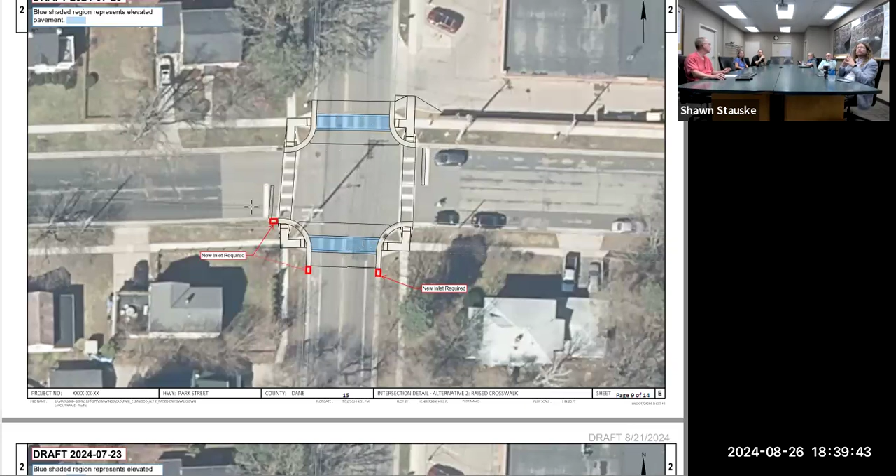It's quite a bit more money to raise the whole intersection too. Yeah, it was about double. Because you could do 2 intersections, you're just raising the crosswalks, for the same price.

Not quite, I guess, but it's something to consider, depending on where the storm sewer is, because that's going to be in addition to the concrete, if we have to relocate them at both intersections that we do.

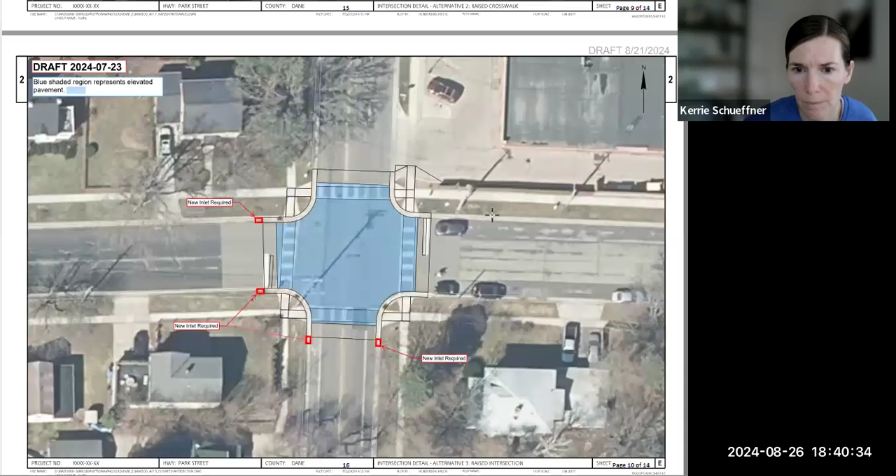I'm okay with number 2 for 122. Seems like, you know, the least -- at least doesn't cost as much, but it does certainly make an effort to slow some traffic down and create a scenic area.

How do those raised crosswalks survive and work in winter climates on a busy road like this? We're about to find out. We have some at Red Tail Ridge, brand new. Other than that, we just have speed humps, but not raised crosswalks.

Those aren't on Park Street, are they? Yeah, uh-huh. I'm just wondering. But the plows have to go up and down all the same streets. Sure, like Valley Ridge, it's got those big, long, wide monster concrete ones.

They should, I think, plow reasonably similar to us. It's the same approach. You cut the concrete, cut the pavement out, and then pour in the raised concrete walk area, crossing area, correct?

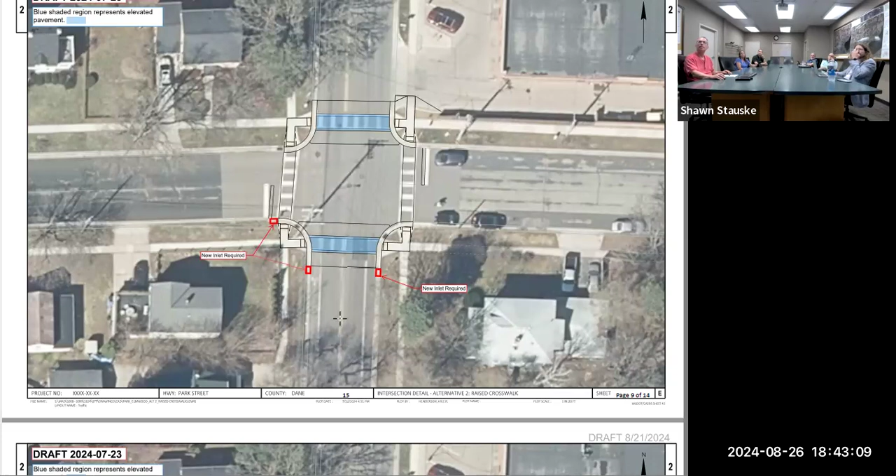Oh, I was just wishing I wouldn't have missed that meeting. I was trying to find the minutes. I don't think they're published yet.

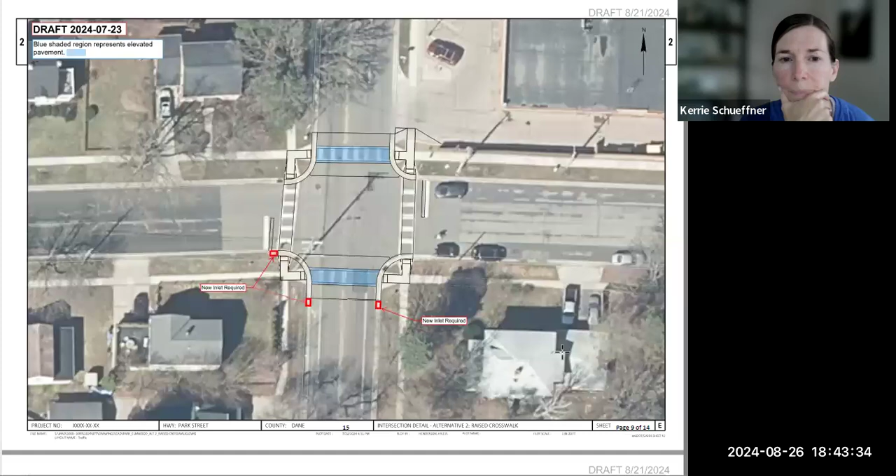I just wanted to better understand the benefits of a raised intersection versus the raised crosswalks. I kind of agree, for the cost it seems like it might meet the same purpose. I wish I better understood what the committee was thinking. I don't know if Mark shared more information, Shawn, on why the elevated intersection alternative was the preference.

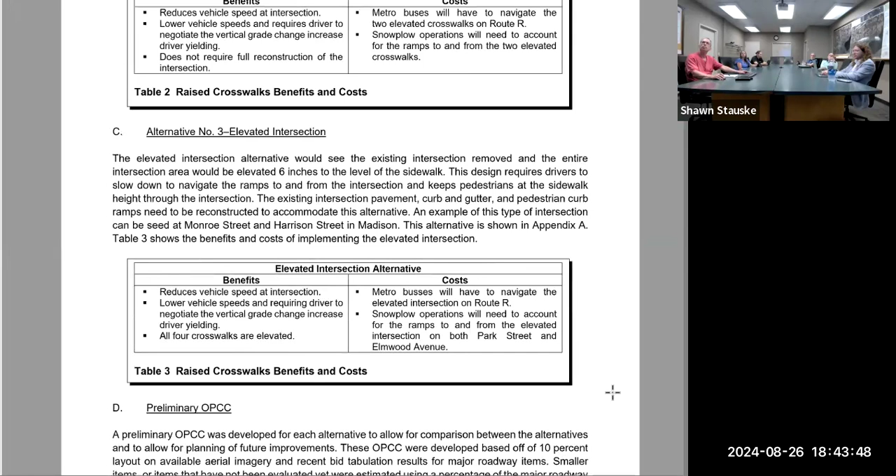You can look at these grids here for the comparatives on them. It's pretty similar from a comparative pros and cons standpoint. The elevated option effectively has higher costs because it's more concrete. The way it's described, the raised crosswalks don't require full reconstruction of the intersection, so we wouldn't have to adjust all the castings out in the intersection and replace the blacktop with concrete. It might be worth looking into a hybrid where we do the approaches with concrete, but the flat central area just gets paved with blacktop.

It costs a little less upfront, but it might not last as long. That's sort of a higher impact area then.

The raised table intersection might be marginally better in terms of ADA accessibility, because you're not navigating down into the street and then up again on the ramp. You're staying at one level, so if you're a wheelchair user on the raised table, yeah, it would have flatter, if not non-existent, ramps, because the whole intersection just goes up basically to the elevation of the sidewalk curb outside the street.

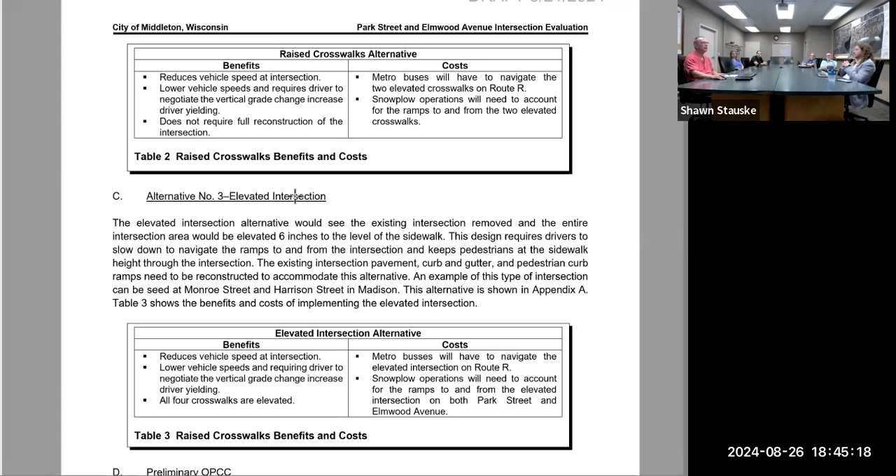One of the things to think about comparatively: it's rolling quickly, so for those with vertigo, if you had four of these on a bicycle, you'd be going up and down repeatedly. Or worse, around a corner, you'd be going up, then down, then back up pretty quickly while cornering. It might be a little convoluted for a bike or motorcycle, something with less friction than four tires.

A motorcycle can handle it, it always depends on the speed though, doesn't it? Motorcyclists who ride that fast are just plain reckless. We should probably consider the bike aspect here since Elmwood is the designated bicycle corridor. I wouldn't worry about motorcycles. And yet I would.

Particularly from a bicycle standpoint, having to go up those raised crosswalks twice, and even driving, that's going to slow things down. I understand option number 3 is a little more expensive, but I think it's also probably longer lasting, more effective, and easier for people to navigate.

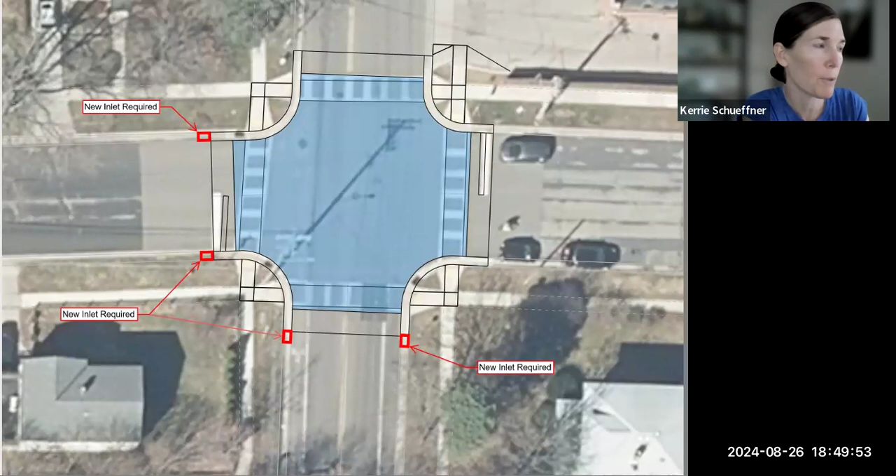Kerrie, you have your hand raised. I was just gonna say, in the memo it said that Monroe Street and Harrison Street in Madison have this raised intersection, so I pulled it up on a map. I don't know, Shawn, if that would be helpful, but it doesn't have the vegetation, just like what you're talking about, like a satellite image.

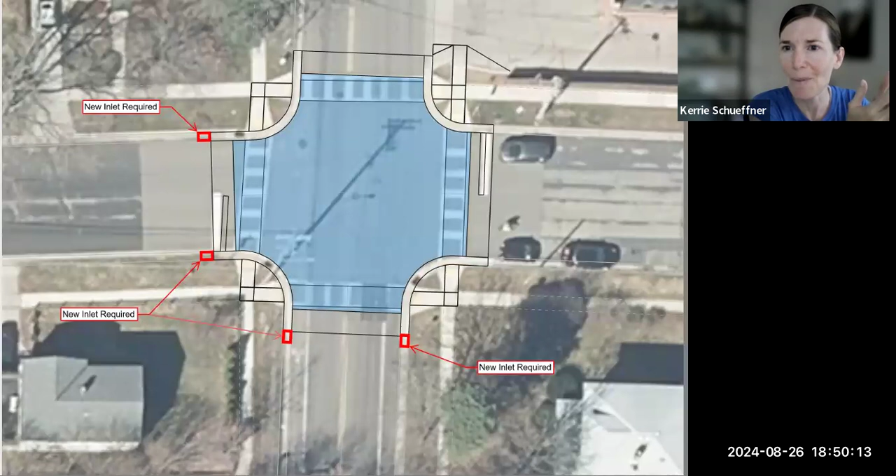I've definitely driven on Monroe Street, and I don't remember that it was a huge inconvenience. So I'm thinking that the raised intersection might be a good way to go, especially if that's the other committee's recommendation. But it's good that we have an example, locally.

This goes ahead, it's 2026. I put money in for the raised crosswalk in the 25 budget for consideration. Just the crosswalk, not the raised intersection? No, the raised intersection. Yeah, we requested 250,000. Yeah, it was down near 7 on the list, something like that. Yeah, it wasn't rated top of the list.

So what do you need from us tonight, Shawn? Just concurrence or not, but I'm trying to figure out before we engage anybody to move into final design, is that what we want? Because if not, we need more discussion first, otherwise we're just planning the wrong thing.

Ped Bike has gotta come back with their final recommendation, because they have not yet. I got the impression from Mark Opitz, by consensus, they were satisfied with option 3. I didn't get the sense that they wanted to take it back up, but if Public Works Committee has a different impression, I suspect they would be happy to take it back up.

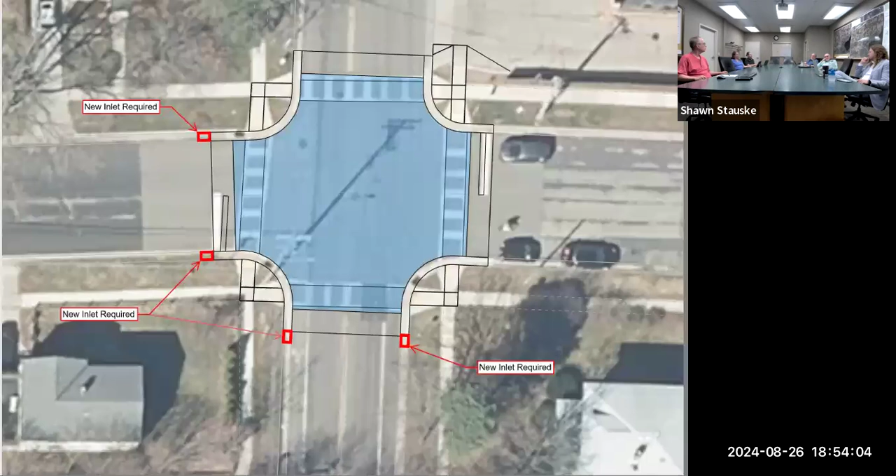I understand wanting to not spend money. Yep, we're just spending other people's money. So I'm always about, in my opinion, just finding a reasonable place. I think it's important to be mindful of the money we spend. We want to meet everybody all the way around. We want to give them a safe place to cross. We want to control traffic. We want it to be effective. And we want to always make sure that we have money for other things.

With this project, we could do 2 raised crosswalks, one somewhere else in the city, as opposed to 1 raised intersection in 1 spot. Accidents there, Shawn? It's been a while since I tracked crashes here.

So I don't know, it doesn't stick in my memory as a hot spot. Can't say. Kerrie, you've got your hand up?

I was just thinking that maybe, I agree with the recommendation to throw it back to the Pedestrian Bicycle Transit Committee, or maybe we defer this until the minutes are published so we better understand the reasons why the raised intersection was more preferred, to get their perspective from the bicycle side. We kind of talked about how maybe for bicycling it would be better, but I think it might be helpful to get more information before we make the decision, if we have time.

I don't know, Shawn, if we defer this or wait, how does that work in terms of design and implementation? Sure, that's a good question. I don't know for certain, but the way I'm envisioning this is once we release Strand to pursue final design, ideally we'll have something put together and out for bid by December, maybe January. It's not a very complicated bid package we have to put together for something like this.

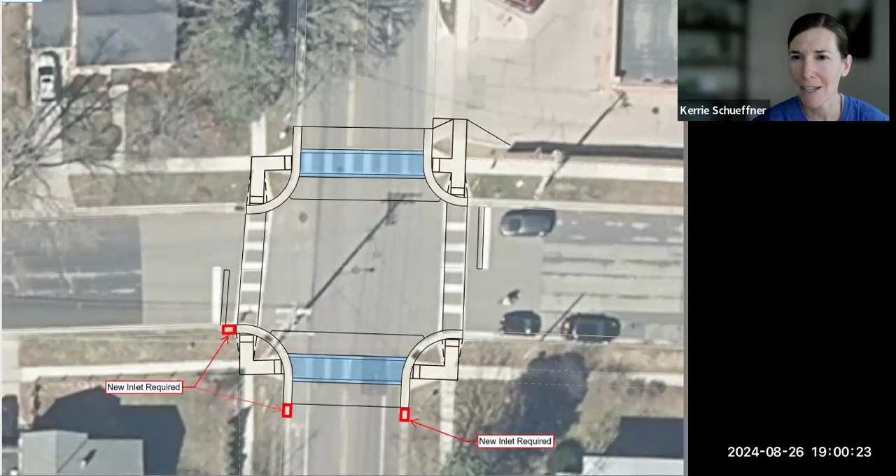Shawn, with that deferral, is it possible to ask for the minutes, or how do we get some more information from them? Yeah, I'll see what the minutes say. I think Mark gave me the verbal summary of what he was prepared to write, I just haven't seen it yet. That's all I could put in our packets for now. I don't know if there was an intention of giving more in writing, or the other option would be to view the portion of the meeting where Ped Bike Transit discussed this prior to reaching consensus, which would flesh out their thoughts and reasoning more.

Okay, I still think we should wait for the minutes. Yeah, I agree with that. And they may see this discussion and decide it would be a good idea to give us a very clear summary of exactly what their considerations were when they coalesced around option number 3. Sure. I would imagine Mark could do that. Opitz. Yeah.

Well, ideally, minutes are really just the official action of the committee, not the discussion or rationale. But that would be embedded certainly in the video. Yeah, and I got the impression there were no motions made, just discussion and consensus.

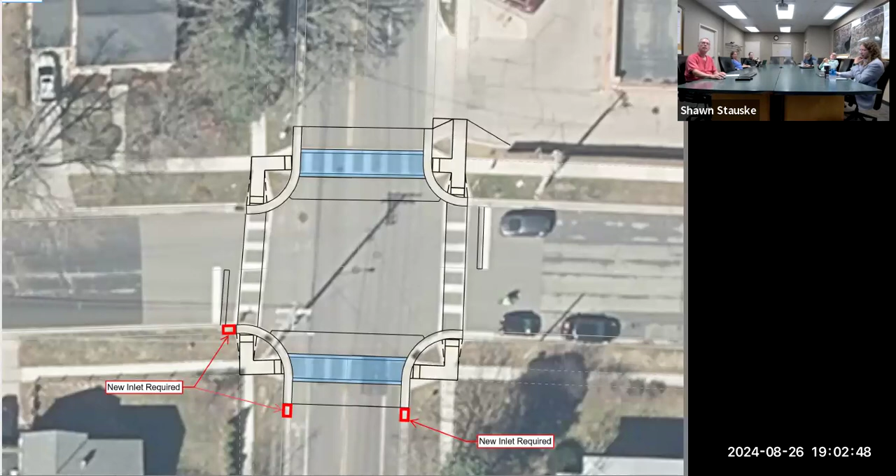All right, item number 3, Parmenter Street reconstruction, Amendment 4 to agreement with MSA for revisions to final design 09-117. Sure, the short version is this is what we knew was coming. When we sat down a while back and talked about final design, it was understood that final design was ongoing and a bit iterative because of the bike ped versus condemnation change we've been dealing with. So we were trying to get consensus of property owners for the real estate necessary for the design. Through a multi-loop process in design, Krista Sommerfeldt is actually with us tonight from MSA, who did the guts of this work, and finally got final design to the degree that there seems to be acceptance of abutting property owners.

And so, what we knew at discussion at the committee level last time was there would be a need for an additional amendment to account for the extra work that went into that, and that's what this is. This has already been reviewed by the city attorney. It's in our form, but no, it's been reviewed by me. So I don't anticipate any city attorney red flag.

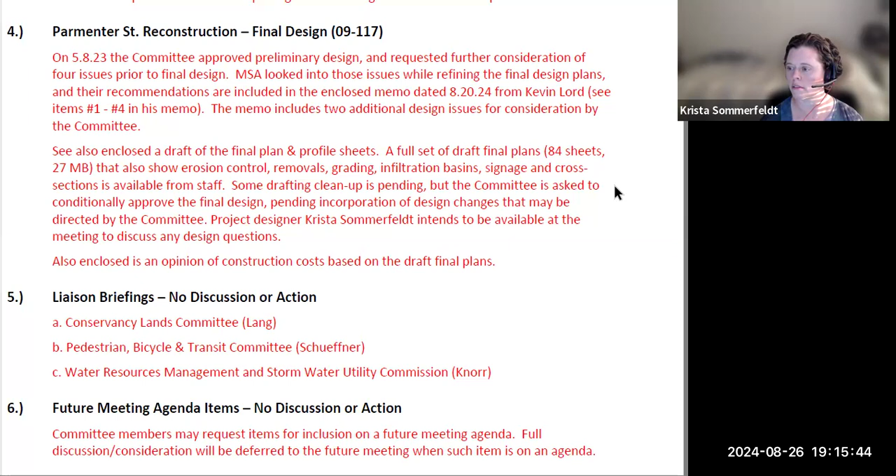While Krista's looking into that, are there any other ideas or issues we should be thinking about? Looks like the plan view has a pedestrian path on the east side - correct, that's the multi-use path. Yep, multi-use path. West side is sidewalk.

It looked like early on there was supposed to be a multi-use path on both sides, is that right? No, there really wasn't, even from the concept section we were looking at. It was an idea from the Public Works Committee to look into multi-use paths on both sides. That's one of the things this design memo recommends against, for lack of space. The design is difficult enough with just the sidewalk over there, but trying to widen that suddenly to 10 feet starts taking extra real estate, which is what we've been working against at two properties in particular.

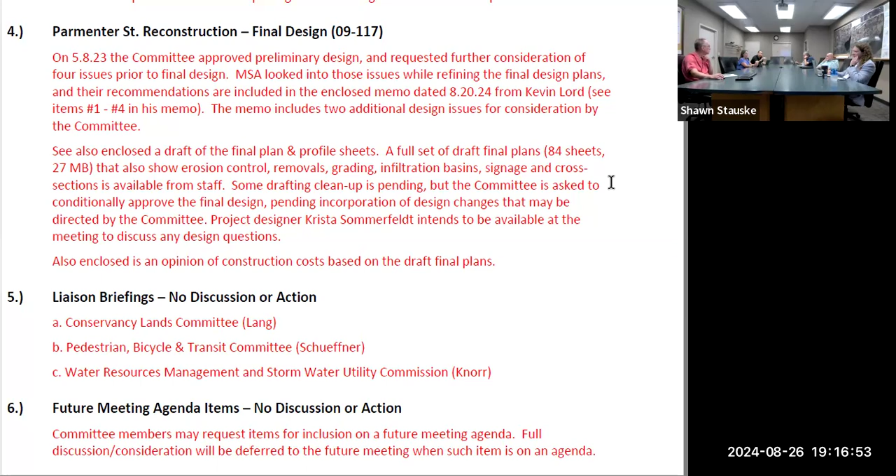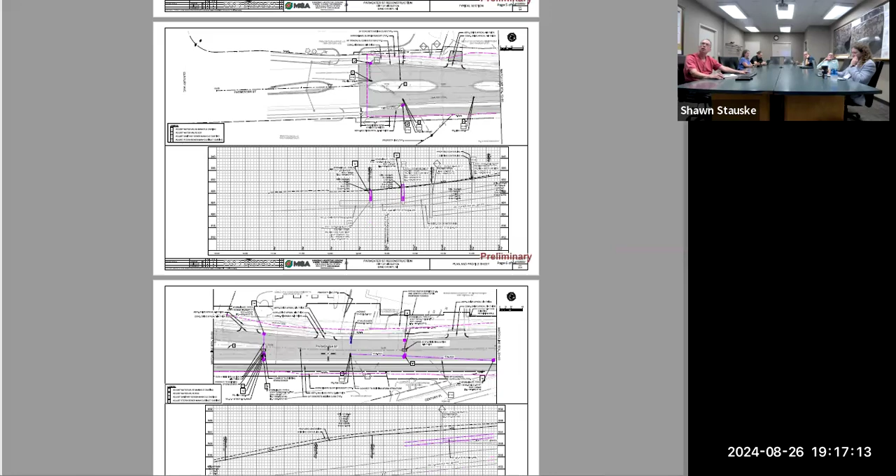Where does that driveway sit in relation to the right-of-way line? It's the spot where we needed the most acquisition, but we had the least opportunity to make the turns into REA work well. So while this median had originally extended through the middle of the road at 22 feet wide, it is now 0 feet. That's one of the biggest changes we made to the cross section, because we had to make this work for the property owners.

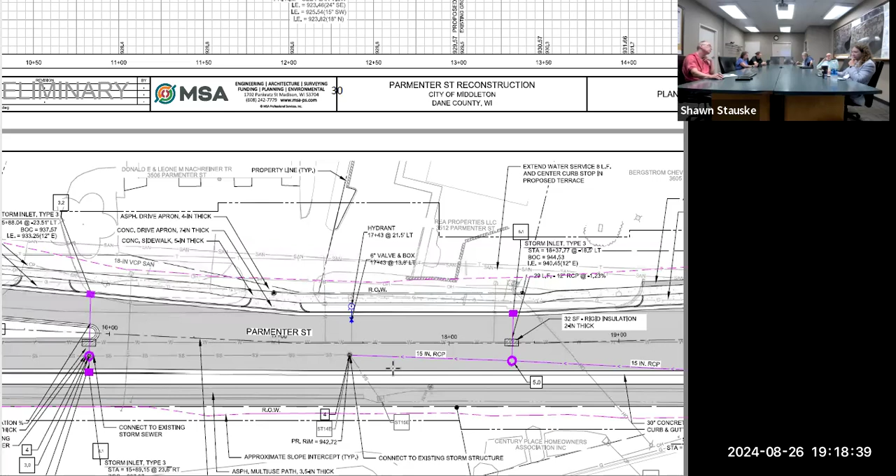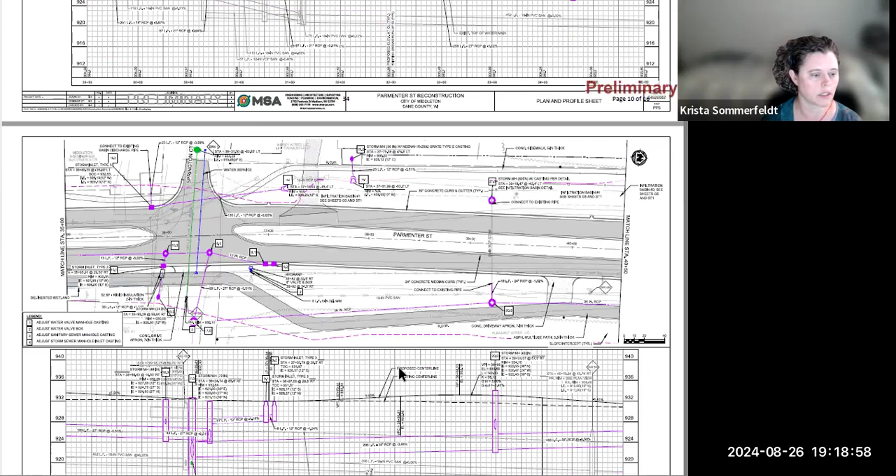Ron, going to the map, show the drawing titled G2, I think. G2, it's got Century Place on it. Drawing a bit of a blank - keep going. G2 would probably be up closer to the beginning of the plan set. You're looking at an overall view, is that what you're asking about? Oh, there you go - is that G2? Okay, zoom in on Century Place.

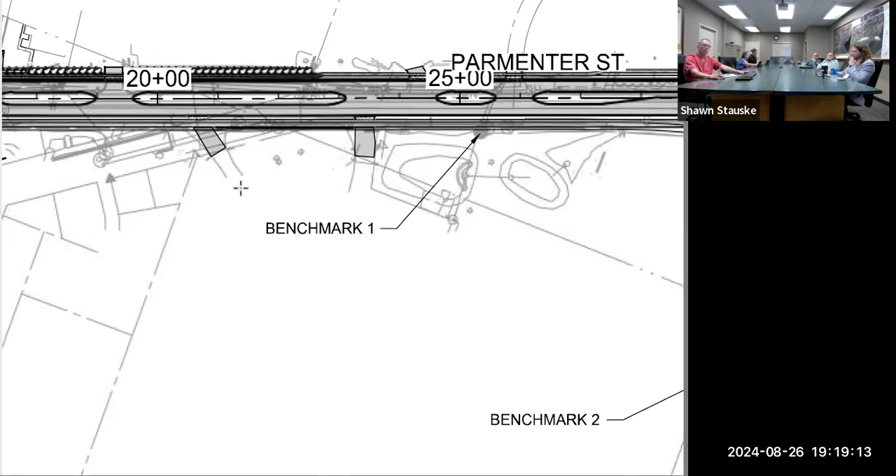Okay, so what you're saying is, right now Century Place is a dead end to nowhere, and on the proposed plan that will remain the same. What Charles is asking is, is there a way to have a bike path connect through to there, or to completely open it up? Well, I'm not asking to completely open it up - you just want a wide enough path for a bicycle to get from here, if they're there, to there.

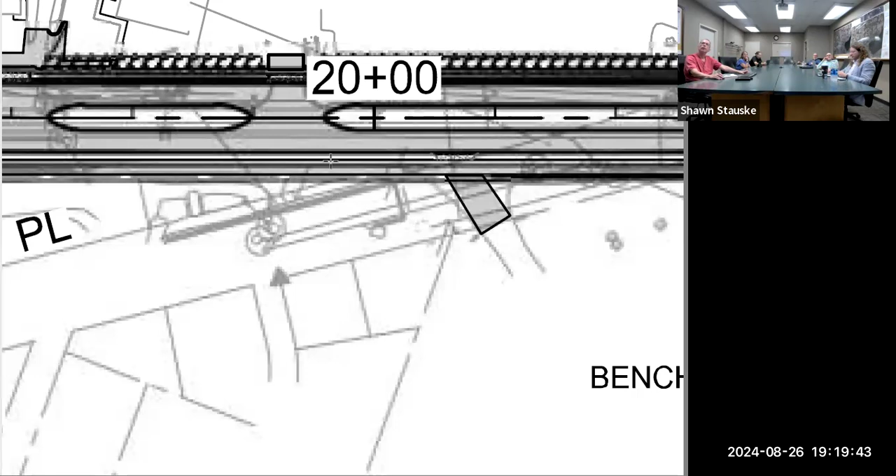Yeah, part of what I didn't remember is that there's a retaining wall there, and this isn't at the right level of detail for me to... I was looking at that Google map. I know we had some along the cemetery - let's see. Yeah, it looks like we're okay at the end there near that station 20+00. It looks like we would be okay - we're matching into the grade relatively close there, so there's not a wall or a big change.

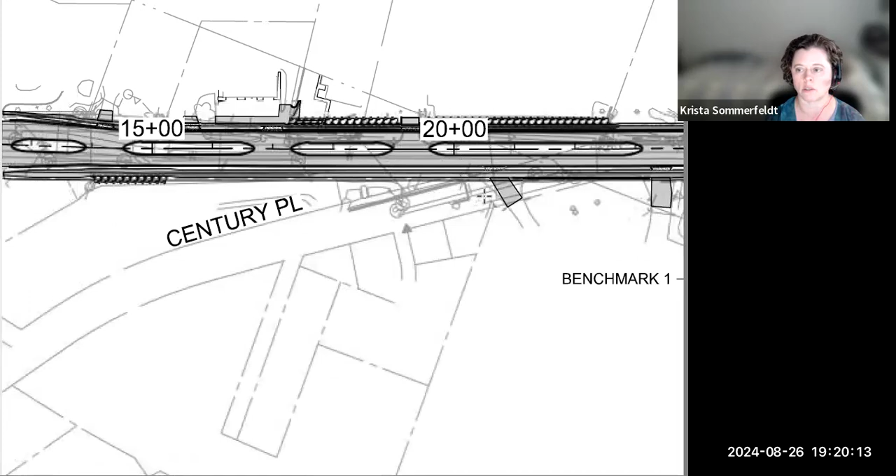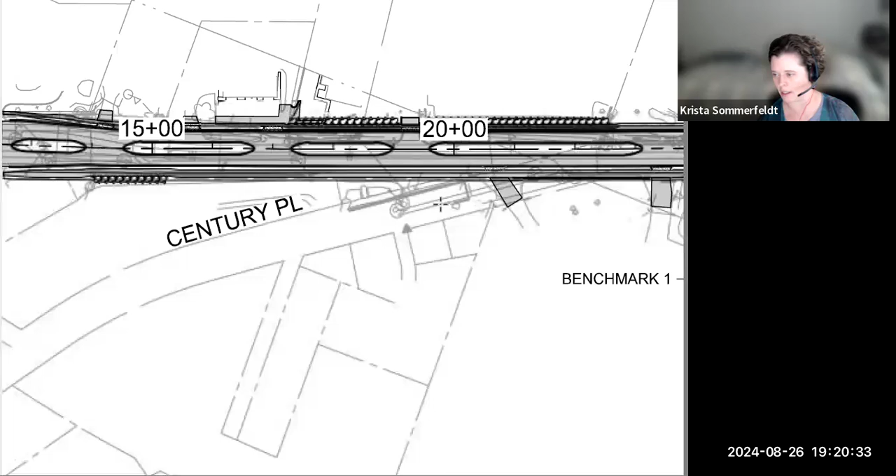Okay, there needs to be some connection there for bicyclists. Part of what gets goofy is there's a driveway connection right here - yeah, I see that - and then a bike path and a roadway. And it looks like there's sidewalk on the east side, is that right, of Century Place?

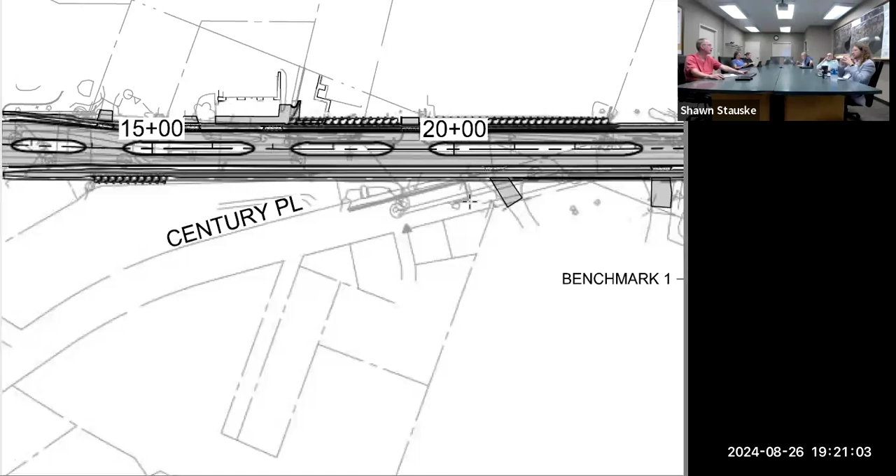I think we do have sidewalk over there, on this side. Sidewalk on Century Place - well, there's sidewalk in front of the homes, but not at this end of Century. Oh wait, yeah there is, sidewalk right up to the end. Part of what caused the request to the city to discontinue that was traffic from Springs Industries using Century Place.

Scroll a little south on that map, just a bit. Let me see if this lines up with what I'm seeing here. So what I don't see on there is that right now there's a sidewalk on Century Place - I don't see it on this map. Well, this isn't showing the sidewalk of Century Place, just the right of way. Yeah, so there's a sidewalk that parallels Parmenter. You could actually turn in off that sidewalk and have it connect to our bike path.

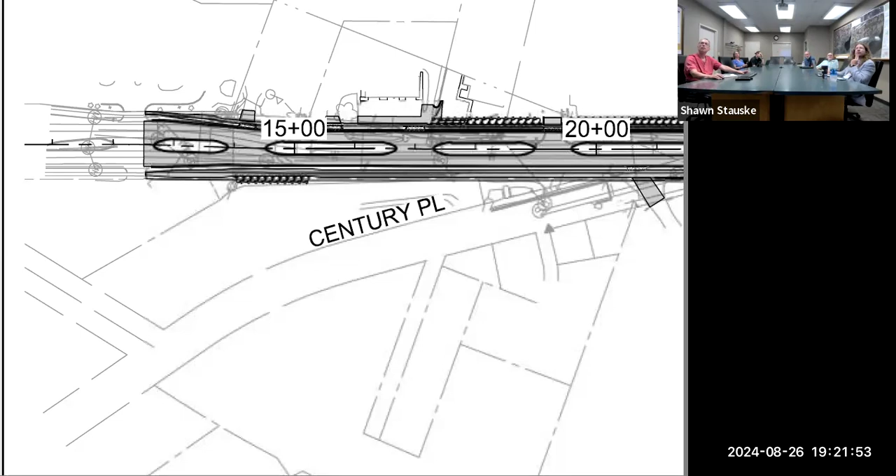Okay, so we could probably get a sidewalk in here without cars. No, there is a sidewalk right now, and it ends though, you know - it ends with the driveway. The sidewalk's interesting, it connects and loops around and back to Century Place.

Interesting - I think that's through the cemetery. Is that the road you're looking through? Oh, is that the cemetery? Yeah, well that's just a little driveway. Yeah, so that little driveway just comes back out. What if you drove into the cemetery as a bicyclist and had a bike path that connected that driveway? Because I don't think you're burying people along the road, are you? Maybe you are - yeah, those are lots on both sides of the driveway. All right, take that out of the discussion, let those people rest. Well, if you build a ramp...

All works out. All right, we're back down to the end of Century Place. Yeah, right, and we can look at it. It might get a little convoluted as to what's going on, but we could look at maybe connecting that sidewalk out to the bike path - if nothing else, in such a way that drivers aren't tempted to drive on it or get onto the wrong thing.

Yeah, to put a sidewalk-size path there - doesn't look like it would be very long. Just give people very clear and obvious context clues that they can't possibly misinterpret, that their car will not go here. I think that might be the play if we're making a connection, which we should be doing for bicycle infrastructure anyway.

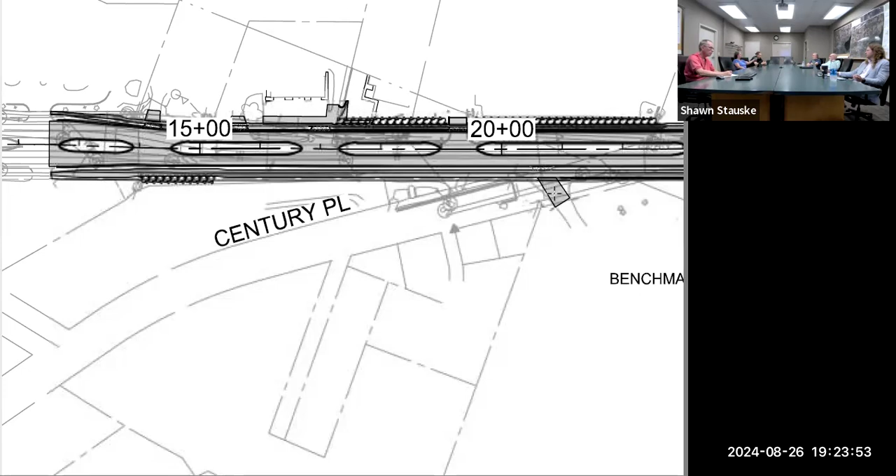What's a bollard? It's that kind of concrete stick. Oh, the yellow OSHA yellow post that you shouldn't run into sometimes? Yes, okay. If you're lucky they have some arrows painted around them that warn you, oh hey, there's a separator around here. OSHA yellow post, gotcha, okay.

Put one right in the middle of the wide bike path so that it's sufficiently narrow on either side that a car cannot traverse. And at that point, if the car decides to use the bike path, literally nothing we could have done because they would have just driven on the grass. But I think if we can find a way to connect the sidewalk out to the path, that probably would be okay.

Great, yeah, because it would be nice to have them connect. Yeah, sure.

Well, you cannot put it there and then over time see actually where the dirt gets worn. If people go there, they have a reason to walk there - the eroded path, yes, that's what that would be called. Like an eroded path, a goat trail. Well, it's Wisconsin - deer trail.

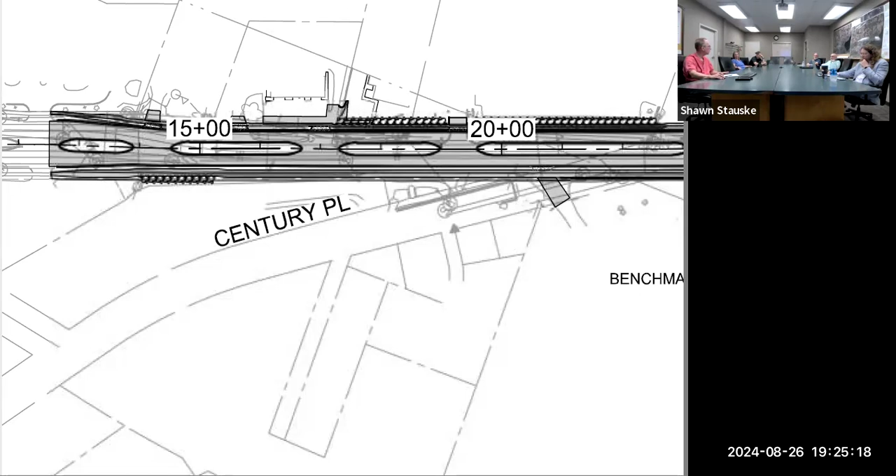Is there any thought about the recommendations in the memo from the issues Public Works asked us to look at last time, design issue wise? Let me zoom back out before scrolling.

So we were just discussing the idea of looking at bike paths on both sides, multi-use trails on both sides of the street, and the recommendation is not to do that, for right-of-way interests. There was discussion of considering potential to paint the bike lanes green. That would be costly, annually costly.

The recommendation is against that. Was that the whole bike lane or just crossings? Well, that was the ask - to paint the bike lanes green or protect them in some way. It's kind of mirroring what Madison has done in a lot of areas, because they've painted them green. But in some parts of the world where it's really bikes only, they are green, but if it's pedestrian, they're not. So what Madison's done is, yeah, you can walk on it, it's for pedestrian and bike, but we're still gonna paint it green. Madison's just kind of done their own thing.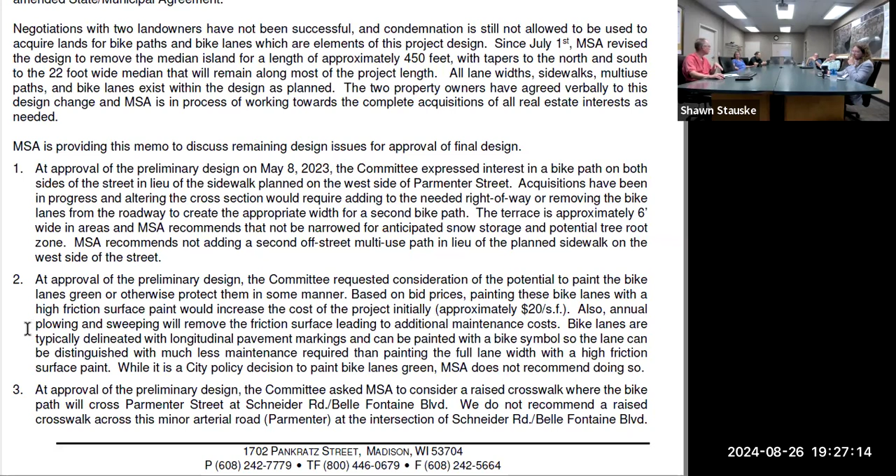Well, at crosswalks though, or at street crossings, not the entirety of the bike lane? I think it's allowed in bike lane extensions through intersections and in bike lanes. There's some sections around Madison that are pretty long sections of all green, but to say pedestrians aren't allowed there is not the case in Madison - pedestrians sort of go where they go. So anyway, the recommendation is against putting green paint on these bike lanes.

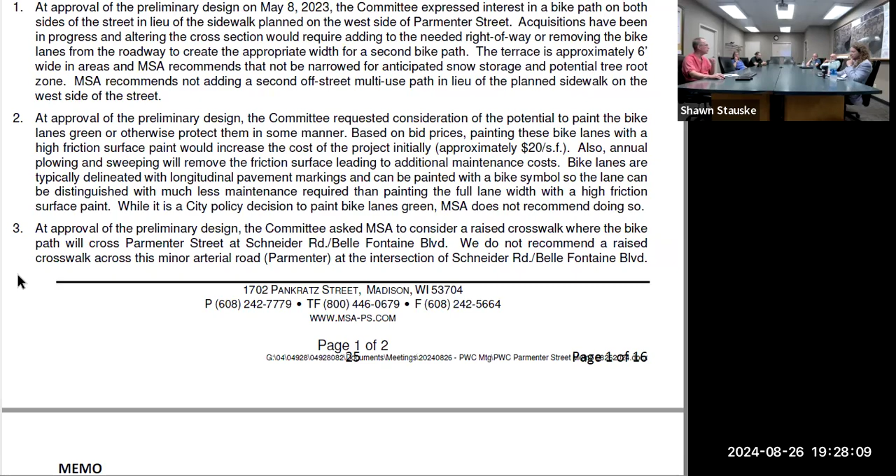We were asked to look at a raised crosswalk on Parmenter Street, where the crossing up at Schneider Road is, near where the salt shed is - we're gonna have a crossing there. I would be hesitant to put a raised crosswalk on Parmenter Street, knowing trucks are gonna be bouncing around on it and creating all sorts of noise, but that is one thing we were asked to look at. I think the option to consider might be something like an RRFB there, or in the future, it could be a controlled intersection, but for right now it would just be stop controlled. So that's not really in the plans to try to put a raised crosswalk in there.

And then we were asked to look at some sort of low maintenance grass, and MSA has been working with Kylie Shearer, our Parks and Rec director, on what her preferences are for that kind of thing up in the median. I think she has as much interest as anybody in limiting the amount of staff time spent out in a median. In terrace areas, she's just recommending turf grass like anywhere else. We could take the no or low mow seed mix here. I think it's a good place to try it, and then if we like it, there are plenty of other medians in the city that we might also, over time, as we're redoing roads, retrofit - we might consider this as a cost saving measure citywide if it works out well here.

Is that the same kind of seed mix that they have in the median on High Point Road right before you get to Greenway? I think that's a strip of wildflower prairie sort of thing that was put in there, but it doesn't seem to get maintained a lot either. Well, it doesn't really need it - it's pretty. It's kind of flowers, weeds, grasses now. Yeah.

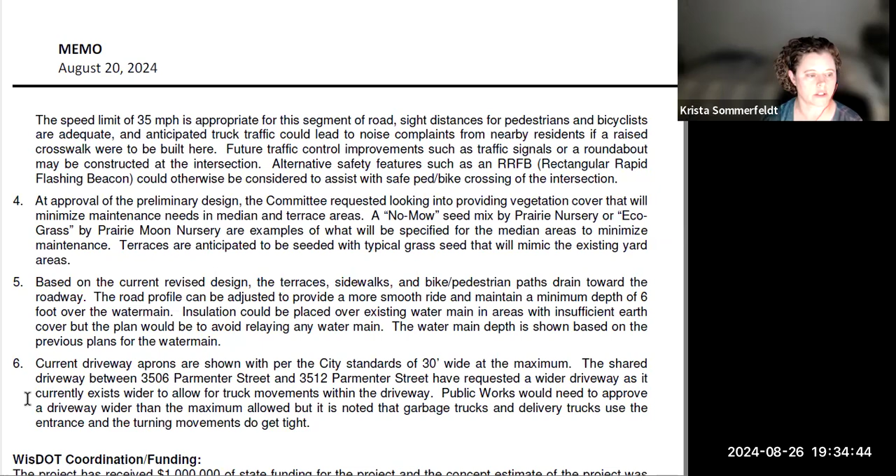Did you have, Krista, any questions you would like the committee to weigh in on or provide guidance for, beyond this? No, I think everything's addressed in the memo that I had on my list. Anything else from the committee then?

The recommendation would be for conditional final design approval of the drawings from 820, with incorporation of these two design changes. I'll make that recommendation.

I'll second. Oh, I'm sorry, go ahead, Charles. No, you beat me to the punch by about a second. There's gonna be a thumb wrestle off. Oh, God, he's a lot younger. Loser has to cut his hair. I just have to say that. Laura will second that. I don't think you can be calling that out.

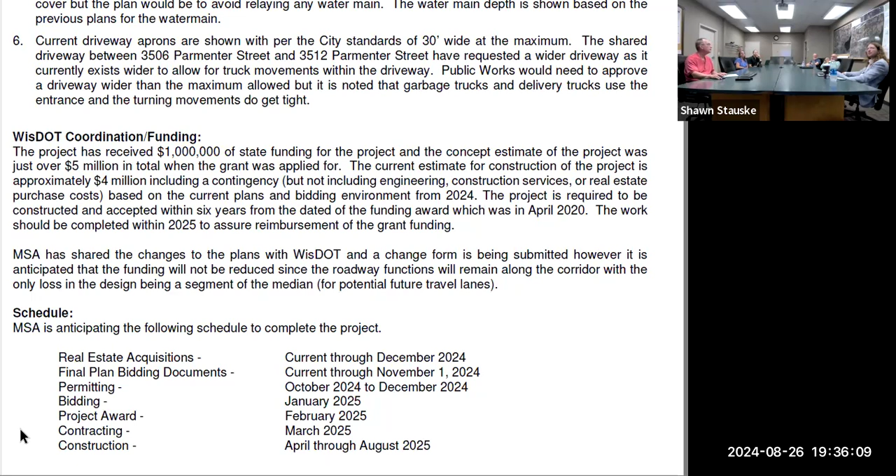We have a motion, we have a second. Is there any further discussion? Hearing no further discussion, all those in favor, please say aye. Aye. All opposed? Hearing none opposed, motion carries unanimously.

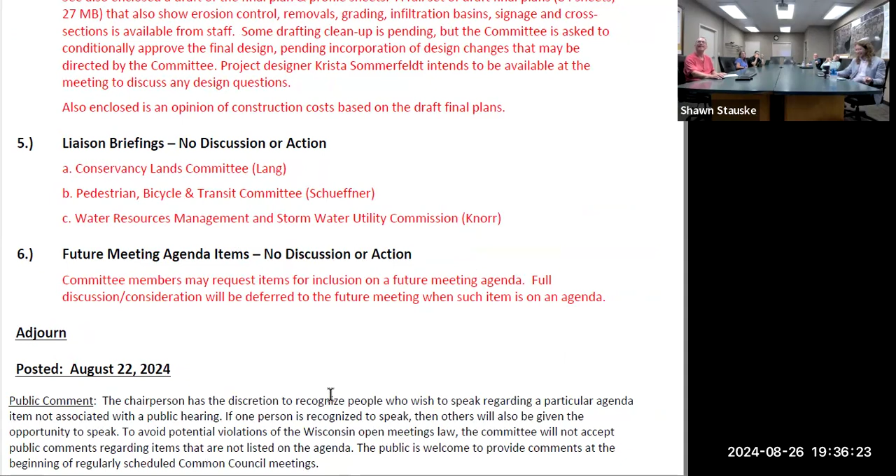Thank you, Krista, for joining us and for all of your work and perspective the last two or three years. Yeah, thank you. Have a good night.

You too, thanks. Okay, item number 5, liaison briefings. Brendan, Conservancy Lands, anything? We didn't have a meeting since our last meeting. Okay, Carrie, anything from Ped Bike Transit? No, we didn't have a meeting since the last time we met.

Okay, Don? We had just an exciting meeting. Key things discussed: one, the muddy looking water that was coming out of the rock bed at Red Tail. It was finally determined that we have the county inspecting their erosion control and everything else, and when it rains heavily, it's a construction site. Not gonna happen otherwise.

Ultimately, when that road is rebuilt, and that's not gonna be for a couple, three years, there will be a storm sewer that should pick it up. Hopefully when there's grass, they won't have this problem. They're redoing some of the ponds now to try and control that flow, and the county inspects it, so they're the ones in charge.

There's always talk about referendum. There will be a public hearing, I think October 2nd, on that. And that'll be on the agenda next month to discuss items and how we're going to present that.